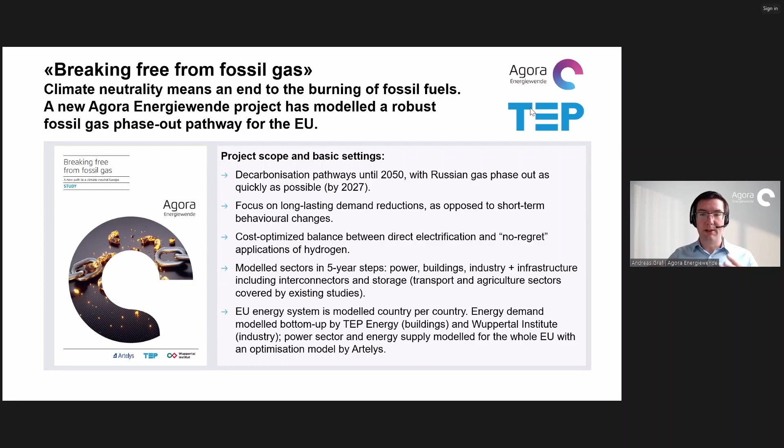This system was modeled country by country and bottom up, in the sense that the building sector was modeled in detail by TEP Energy, and the industry sector was modeled in detail by Wuppertal Institute, and this fed into an overarching energy system and supply model by Artelys. So this work is intimately interlinked and gives us this overall picture that we now can show.

Another note of background: we worked here in detail with 9 national partners to develop so-called deep dives for these focus countries. The choice of countries was such that we largely looked at Central and Southeastern European countries against the backdrop of the energy crisis and their particular dependence on Russian gas imports. It also makes for a very interesting stress test of the pathways we have developed, showing quite a variety of different pathways in the details of this transition that TEP Energy will also be touching upon today.

There were 4 key findings of the overarching EU27 study. The first finding was that fossil gas use in Europe can be halved by 2030 and completely phased out by 2050. We believe we have demonstrated that it is a realistic and plausible outcome, making the right investments and policy choices in the coming decades to phase out fossil gas in Europe, while still maintaining our industrial base and fully ensuring security of supply, without relying to a great extent on disruptive behavioral changes to deliver this outcome.

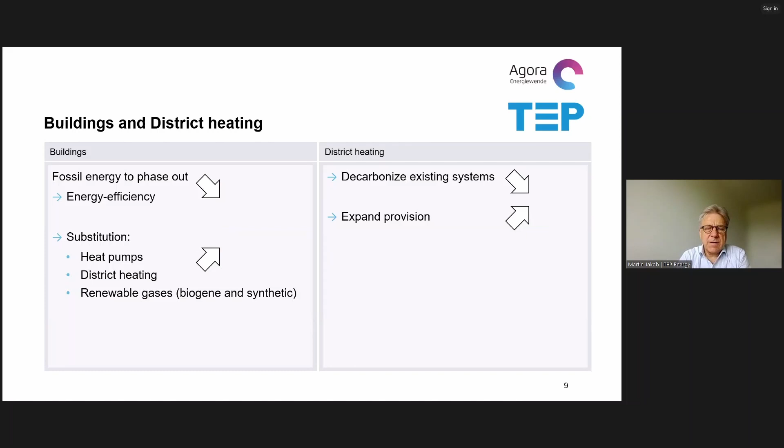When we first go into the buildings sector, what are we talking about? We are talking about final energy, which is delivered for first of all heating, but also hot water, cooking, and also appliances, lighting, cooling, ventilation, pumps, all sorts of different appliances, information and communication technologies, and so on and so forth. This electricity consumption of activities occurring in buildings is part of what we call the final energy, which is delivered by gas utilities, electricity utilities, district heating grids, but also in decentralized form by delivery of fuels.

Maybe to note, a bit peculiar is the term ambient heat. By that we mean energy that is tapped by heat pumps from environmental media such as air, water, geothermal. So in order to have a good distinction between what is the role of energy efficiency, namely to reduce the overall demand, and what is the contribution of such ambient heat, we also balance ambient heat in our results.

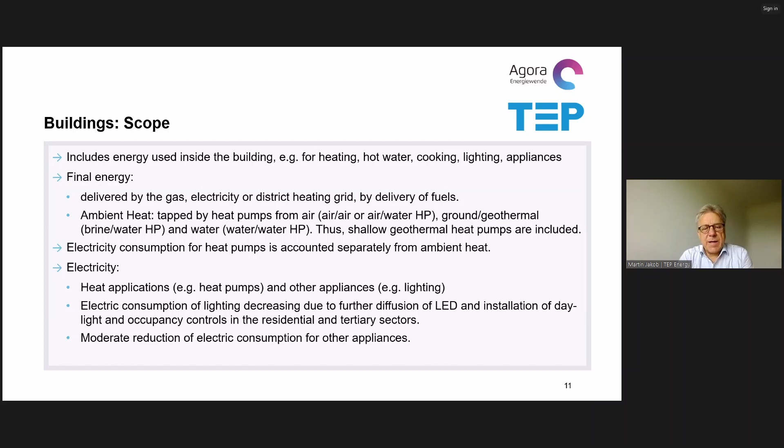In the case of electricity, we have electricity used from heat applications and from other types of applications, which we also roughly modeled and will be reduced as well in the coming years and decades. If we need more electricity for heat pumps and electric mobility, there's even more interest in getting more efficient on the appliance side and the building technology side too.

How do we do that? We have a long-term bottom-up model, a cooperation between TEP Energy and Fraunhofer ISI, where we model EU27 plus 3 and some more countries, starting with the main drivers, which in the case of the residential sector is the floor area of residential buildings and the number of households.

If you have these drivers, then you need to cover the energy demand of these buildings, which is influenced by insulation levels, efficiency of building technology and appliances, and very much so indirectly by the lifetime of these components, because this determines how quickly you can improve energy efficiency and displace existing heating systems by other ones.

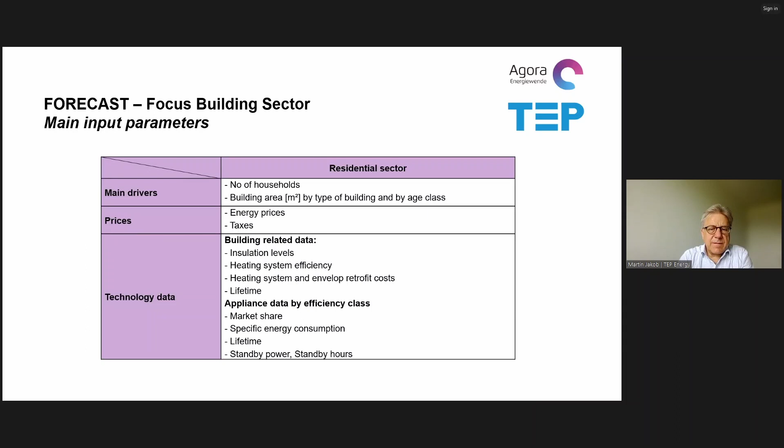From this rather abstract level, where we would like to make as realistic an outcome as possible of our studies and analysis, we place the decision of building owners in the core of our consideration, and this decision is influenced obviously by the costs of the technologies and by the costs of energy.

This in turn is influenced by policy measures, by taxes and fees, for instance. The decision of building owners is also influenced by preferences, by a certain willingness to pay, or a certain reluctancy against a certain system. These aspects are very important to consider.

This willingness to pay, or willingness to substitute, can be influenced by policy measures, for instance by subsidies, by tax incentives that would change the relative economic performance of different systems. You also increasingly need to work with more stringent policy measures such as bans and product standards. To a certain extent, preferential loans could also help steer building owners towards more renewable, more efficient choices.

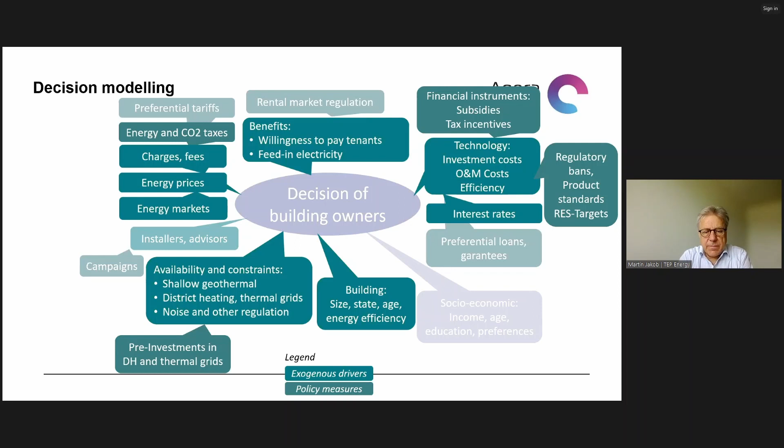You can see more details in the slides provided. Just a short glimpse here on our model, which contains a building database and a cost database, both feeding into the choice model, the discrete choice model, to reflect the dynamics of the building stock, which is driven by the decisions of building owners.

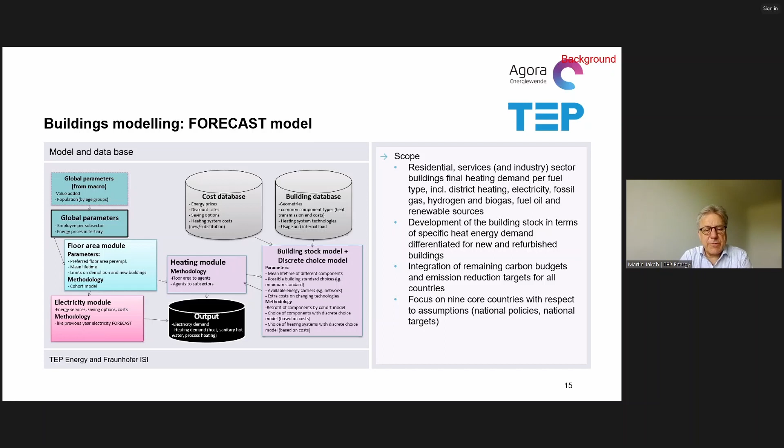As I mentioned, building owners' decisions can and should be influenced to a certain extent by policy measures. In this study, we assumed first of all that you should avoid any subsidy into fossil fuels, and instead price CO2 emissions with a carbon tax, the effect of which depends very much on the level of that tax. In Switzerland, for instance, we are at roughly 120 Swiss francs per ton of CO2, so we are somewhat more advanced in that respect.

100 euro per ton of CO2, just to give you a notion, is about 2 euro cents per kilowatt hour of gas. So it's a certain contribution, an add-on, but it doesn't fundamentally change relative energy prices.

Buildings need to get more efficient, often only done in the reinvestment cycle, where you can conceive subsidy programs, though the effect of such measures is quite long-term but still needed. As we know, renewable energy potentials are limited in their availability and also in their economics, so keeping a focus on energy efficiency in buildings is still crucial.

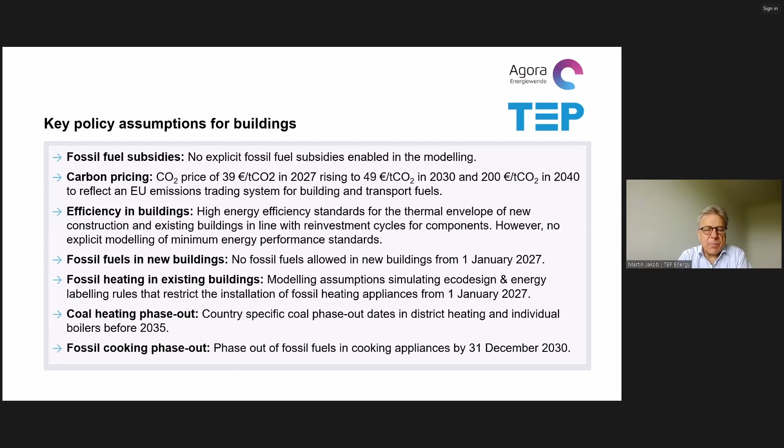We come to that in relation to district heating systems, where in some situations you perhaps need a certain period for planning the switch. Also in some countries, cooking is done with fossil gas, and that obviously also needs to be phased out if complete decarbonization is really to take place.

Different reasons, actually, we can come to that. And district heating is actually increasing a bit in absolute terms and a bit more in relative terms.

We have been focusing regarding the district heating question on these 9 countries Andreas mentioned. District heating could also play a more prominent role, but needs to be considered very individually to see what is realistic in the different countries, mainly because of the question of who is actually developing this kind of district heating system. For this reason, we didn't want to be over-optimistic or overstretch the role of district heating. Other players see a more prominent role in that, but we preferred to have a well-founded and fully analyzed role for district heating.

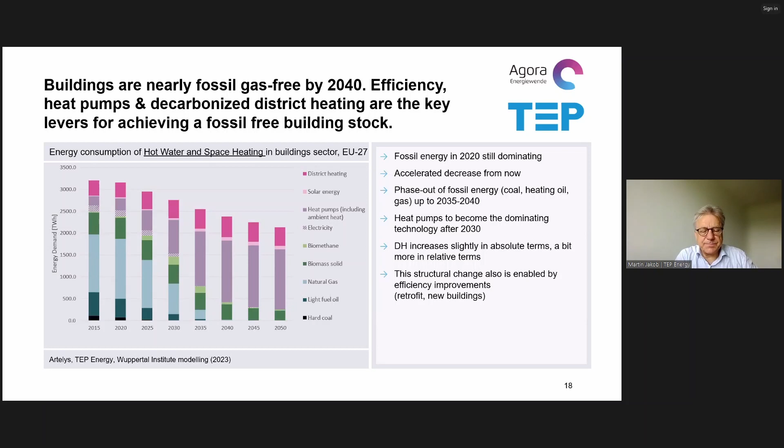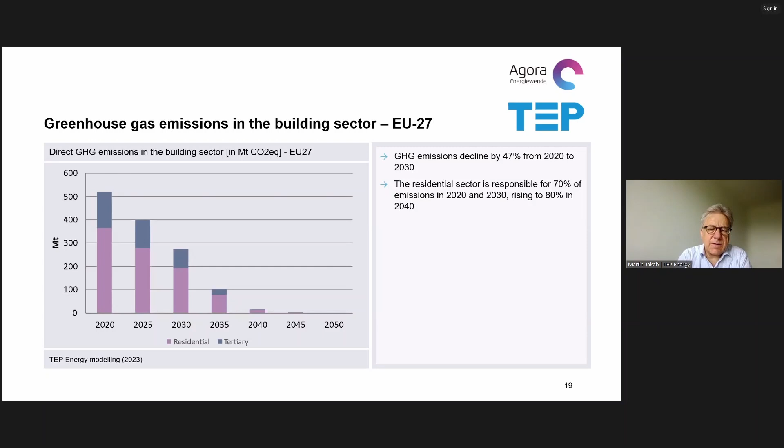So this pathway would then contribute to the overall emissions reduction pathway that was considered in this project, including the contribution of the other sectors.

Now, if we see a bit how the different countries would cope individually with the challenge of decarbonization, I have picked here two examples: a historical heat pump country, such as Switzerland or Sweden, as opposed to countries that are just starting heat pump deployment.

For instance, the Netherlands, which was very much on gas for a very long time. We picked Italy on the right-hand side, which started a bit earlier than the Netherlands, but still also has a very high share of gas in the heating sector. For this reason, starting later and having a bit of a lock-in effect, Italy in the end would not have the same level of heat pump deployment as we see here for Switzerland, for instance.

So you need to be aware that depending on the starting situation of the different countries, the pathway and the mix and the change of the mix can vary. So what we see on EU27 can be different from individual countries.

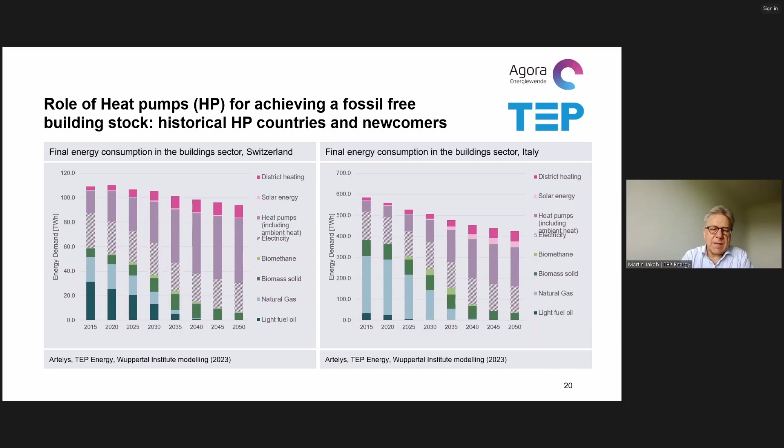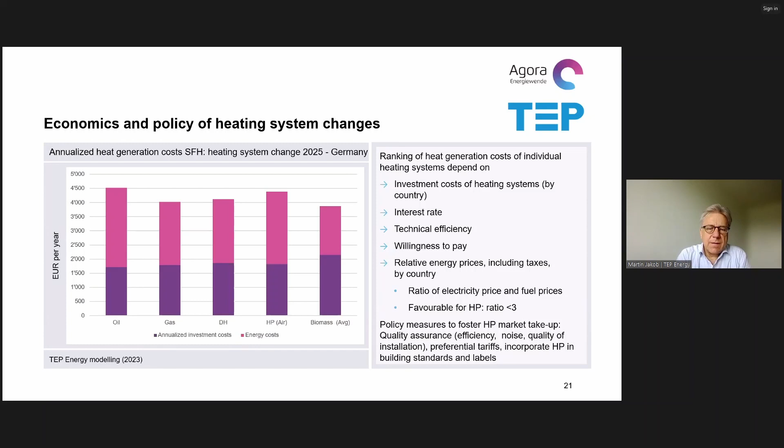of electricity demand in space heating, especially heat pumps. At the same time, in some countries we should also displace direct electric heating systems which are very inefficient. A heat pump could actually replace 3 or 4 of those direct electric heating systems, so that potential and efficiency gain was also considered here.

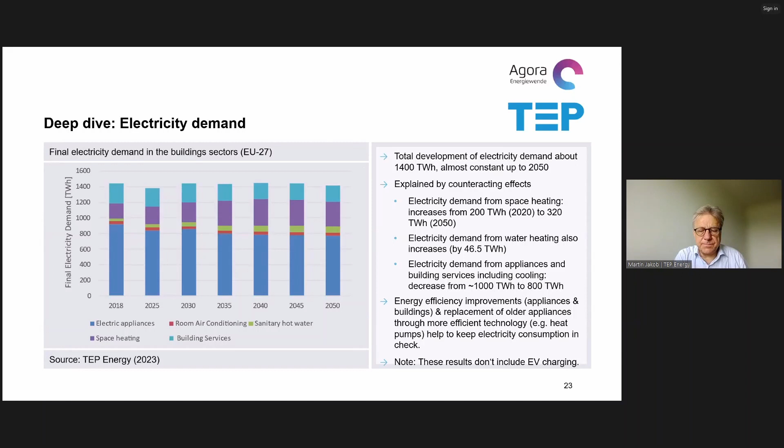So it's as opposed to when we started heat pump deployment in Switzerland or Sweden in the 90s, that was very different. You had some small pioneer companies that would almost manufacture heat pumps manually, to say. Currently, of course, we do have an industrial production of heat pumps. Part of the components are imported and then assembled here in Europe.

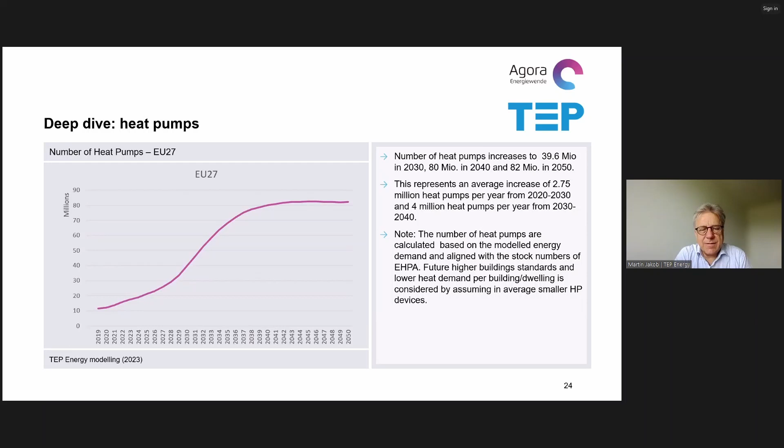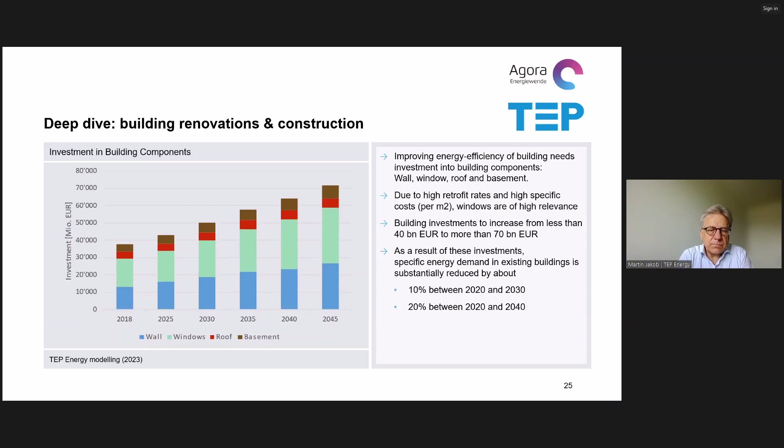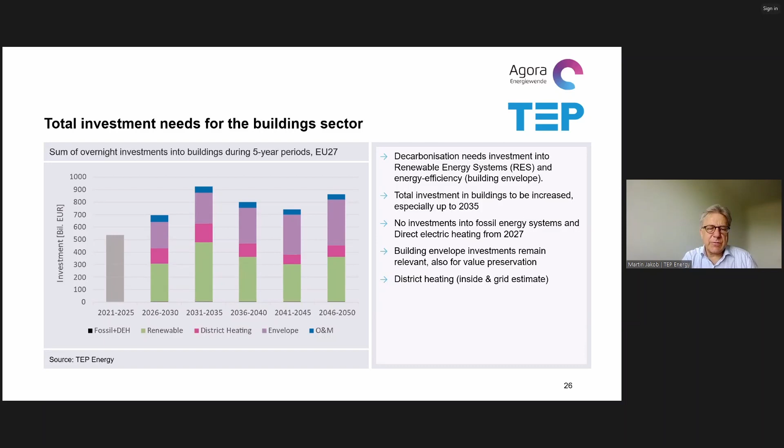If we go then for the overall investment pattern, we see especially a certain peak in the period after the 2030s. This is also due a bit to the intermediate goal that was defined in the modeling exercise. The main message here is you need to increase these kinds of investments next to the building envelope, which is here, let's say the pink, the violet part. There is also investment in renewable energy systems, which is the green part, and in between somewhere certain investments in district heating on the building side, and of course on the infrastructure side, which is not part of this chart here.

This is what I wanted to convey from the part of the buildings sector. I would now switch to the district heating one. And the first question here is, of course, why is it useful? Why would we need district heating? Is it needed at all, and if yes, why?

From the analysis of the past years, we can actually distinguish two types of motivation, if you like. The first one is a positive one: if district heating is favorable in high energy density areas and settlements, it is actually easier and more cost effective to provide heat in buildings through district heating systems. So that's a positive motivation.

It's also a low-cost solution for building owners - they don't need to invest so much, which is appreciated. And maybe not to neglect, you only need to convince fewer actors to decarbonize the building stock, namely these district heating companies or those that would expand or create new offers in that area.

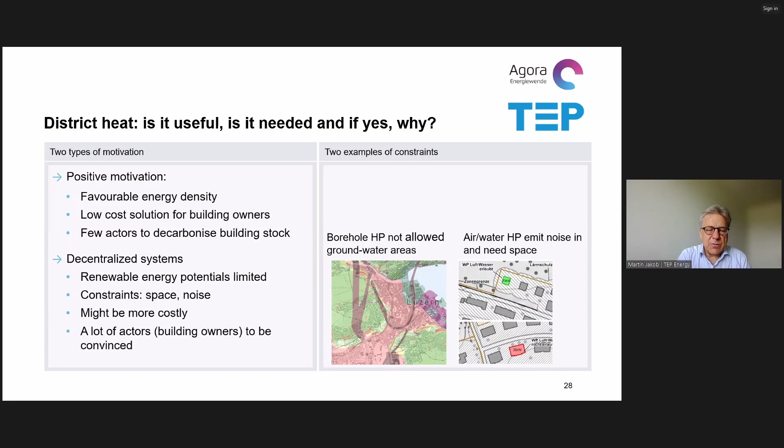The disadvantage is that with decentralized systems, you need to convince many actors—building owners and ideally also tenants living in these buildings who face the costs. So from these two perspectives, we see a motivation for district heating as part of the decarbonization process in the built environment.

Countries start from very different situations regarding district heating provision. The share of district heating in final energy demand for buildings shows a tremendous difference between countries with almost no district heating tradition and others that reach up to 50%. If you zoom into larger buildings, multifamily homes, non-residential buildings, that share is even higher—think of cities like Stockholm, Copenhagen, Denmark, Sweden, but also Eastern European countries like Poland, Czechia, which have very high shares of district heating in certain regions.

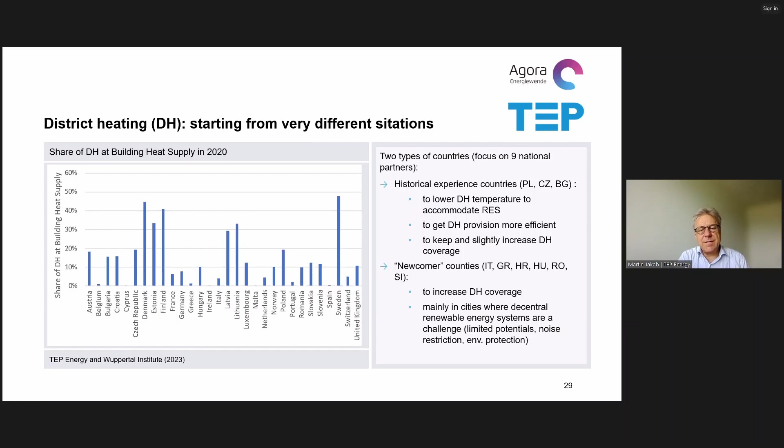Between these historical countries and the newcomers, the challenges differ to a certain extent. The historical ones need to decarbonize their existing system and pay attention to keeping clients so they don't switch to decentralized systems because of price or environmental concerns—in Sweden, for instance, owners switch back from district heating because they'd like quicker decarbonization. Whereas the newcomers need to build up an energy system like district heating first, which takes time and investment.

So how do we consider all this? We're not able to formally implement all these steps in the model, but we do consider these aspects, starting with the demand side: what is the topology—single-family house neighborhoods versus other types—and what is the heat distribution cost in these different settlements? That determines a reasonable scope of district heating coverage in cities and consequently in countries, determined by heat delivery cost, which is also interactively determined by the cost of competing energy systems.

Once the demand-side potential is determined, the second question is: if district heating is available at a certain location for a building, will that building owner connect or not? This is modeled using a building stock model approach, modeling the decision of building owners as sketched earlier in the presentation.

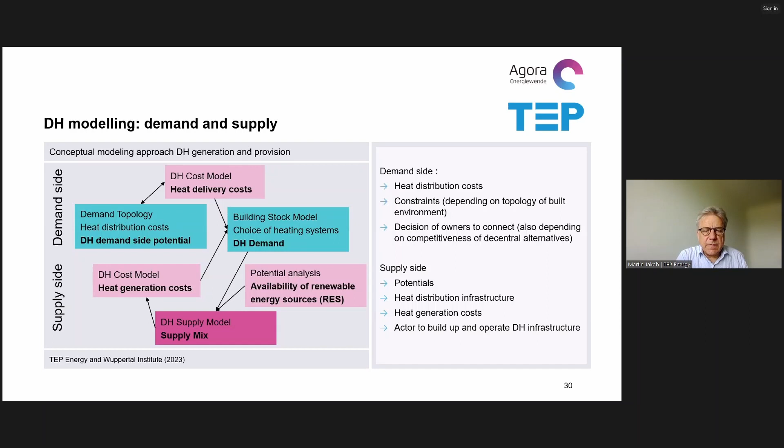So here's just an example, we did not do this for the whole of Europe for that project, but just to give you a glimpse, on the right-hand side you see how the area that could be delivered by district heating depends on the assumed heat distribution costs. At low cost you can provide centers of towns, not necessarily all towns, but highly densely populated settlements. The more you increase the heat distribution cost, the more you could expand the buildings and area covered by district heating.

On the left-hand side, sometimes you can combine cold and heat demand or needs of buildings, where residential or non-residential buildings would have a more pronounced demand for cold. This would also entail the type of district heating grids, going more for an ambient low temperature grid, especially if you can start a district heating grid from scratch, as opposed to historically grown district heating grids which often have a high temperature, which is then the challenge of how to bring down.

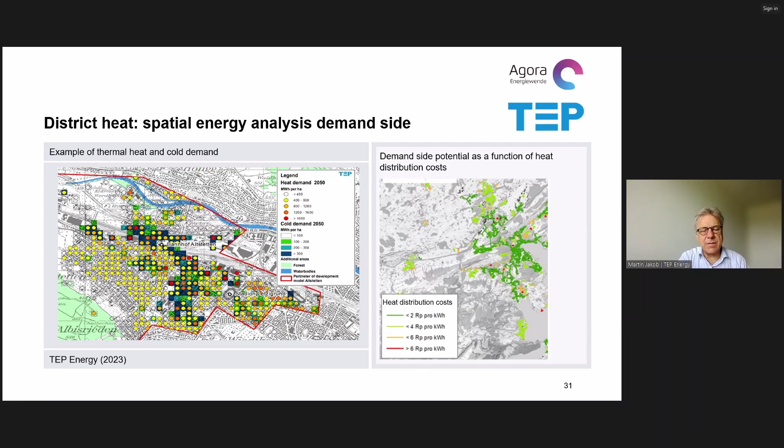Just to give you an impression of what it actually means, you can maybe focus on the middle column here. Based on an analysis in Switzerland with cities of more than 10,000 inhabitants, you would see a certain part of the buildings where it's actually very hard to implement decentralized systems. That's almost the natural way to install a thermal grid.

Then you have quite a large part where actually both is possible, so you can think of thermal grids, but you could also think of heat pumps, particularly geothermal or air. Then there is another part of the building settlements where only one of the two, or none of the decentralized systems, is possible.

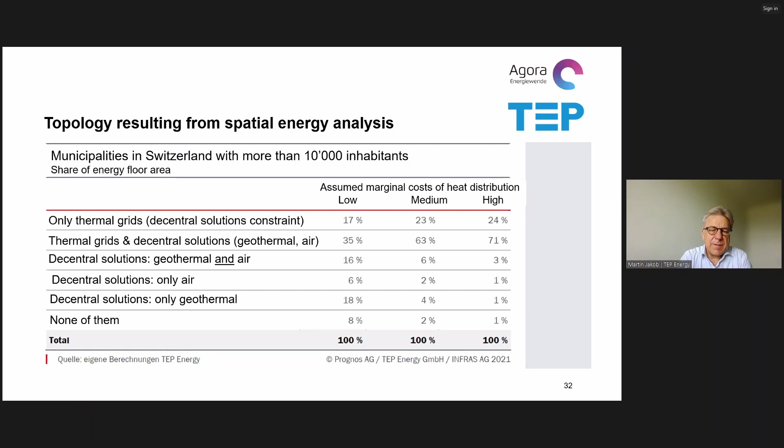Depending on which heat distribution costs you're willing to cope with, you can expand the part where the thermal grid could play a solution. If you only accept the low distribution cost, then only one-third in this example could be delivered by both, where you have that competition situation, and another 17% where it's almost the exclusive domain of district heating. That was on the demand side considerations.

On the supply side, we do see that in each plant or system you will have a mix probably between base load, medium load, and peak load, where base load could be large-scale heat pumps tapping energy from water, rivers, or whatever. Peak load could be anything between biogas and even direct electric heating for the very small last part, and where peak, medium, and base load lies very much depends on the local situation.

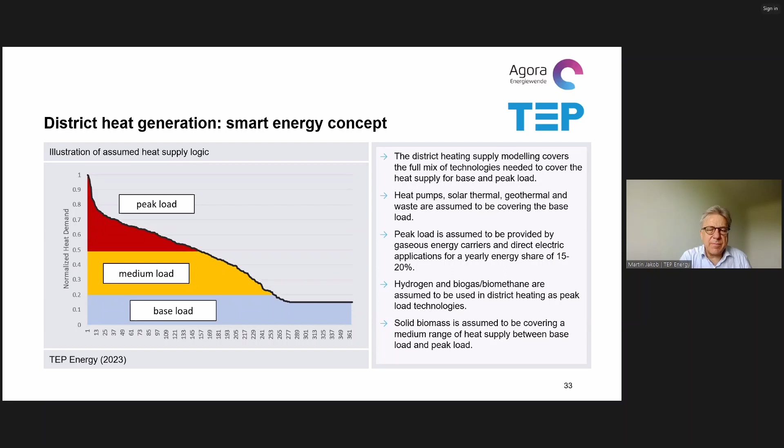Our message is not to conceive district heating systems, for instance, that purely would work on biomass, because first of all we don't have enough biomass, and secondly we'd lose the opportunities of more attractive, more cost-effective baseload sources that are available in many situations.

Now just a few notes, similar to how to interpret the results as in the building sector. We also talk about ambient heat, which can also be tapped in district heating systems by large-scale heat pumps. In terms of sources, maybe to pick here the deep geothermal heat that is actually available in different forms.

There's also shallow geothermal with small borehole heat exchangers, then the medium depth one where you try to get hydrothermal layers—this is done very much in the Paris basin or in Munich, I think so too—and you would have the very deep geothermal, where you could also produce electricity.

We didn't focus so much on the latter one, simply because you need time investments for exploration, and there's a certain exploration risk whether you find such good layers or not. But this deep, mid-deep geothermal energy is still also a joker in the whole discussion.

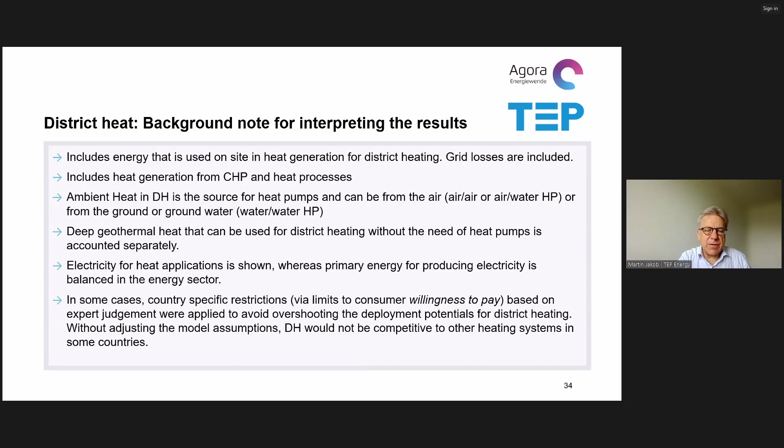Then biomass was the choice in countries that started decarbonizing, especially in the Nordics, in the Baltics, and also in Switzerland. They are unfortunately pushing this pure biomass, small district heating grids, and I think now they're starting to realize that we don't have enough wood resources to do it in such a manner, but we really should use

the biomass for the peak, maybe medium load, not for the full coverage of the heat demand. Ambient heat, which is tapped from heat pumps, is still at very low levels. There are, of course, examples of large-scale heat pumps in Stockholm for instance, and Vienna, and other cities. But certainly that needs to play a more prominent role in the future.

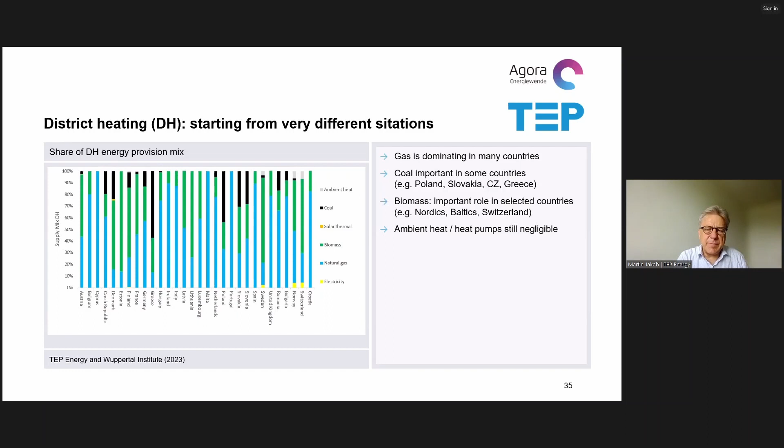Now the result from the analysis, you can see here, is a bit similar in that sense as from the building sector. We need to phase out fossil gas, which is here, and coal, obviously, which is on the bottom left of the chart. Then we have a bulky contribution of bioenergy, which could even increase a bit in the medium term to quickly phase out fossil energy, but after that should rather be reduced, because bioenergy material should more concretely be used in other types of application.

Particularly, it should be used for construction, first of all to displace energy- and carbon-intensive traditional construction materials and building types, and secondly also to store at least intermediately carbon in the built environment, in the construction of buildings, instead of just using biomass and wood as an energy source. When you do so, at that very moment where wood is burned, you release emissions, although these emissions were captured by nature before, but you just release it again. As opposed to using it for construction, then it's at least stored, and there's an opportunity to reuse it several times for quite a long time.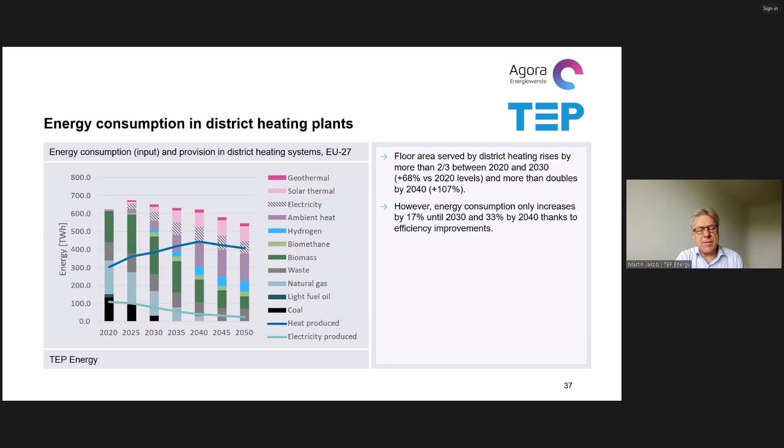Because from an overall systems perspective, the analysis showed that electricity is rather produced by other means than by CHPs in district heating plants. If you would maintain CHP, then the question would be what is the energy carrier, and the potential of biogenic or synthetic fuels is rather limited and more costly. So electricity is rather produced by other central means, power plants, or decentral means, obviously wind and solar PV.

In terms of emissions, we see here not a complete phase out. The remainder emissions from 2040 are basically those from the incineration of waste, which in our study is balanced as real emissions.

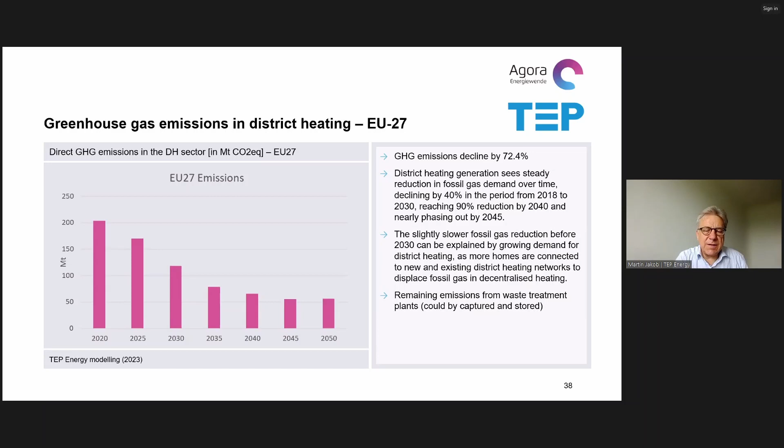Could be, of course, also covered by CCS and captured and stored. This is an additional joker we haven't balanced, but if complete decarbonization is needed, that's one option. The amount that needs to be captured is very limited compared to capturing all emissions of today—really two orders of magnitude lower, and therefore feasible.

Also here, two countries I wanted to select to show that in terms of district heating provision, countries are at very different starting points. On the left-hand side, you see Poland, which has this tradition of district heating, though not dominating—there's also other heating sources, especially coal in small buildings. As opposed to Italy, where it really starts at a very low level. From interaction with the national partner in this project, we see a certain contribution of district heating. I personally still see the benefit of district heating in cities, and Italy has some cities in the north that need to be provided with heat as well.

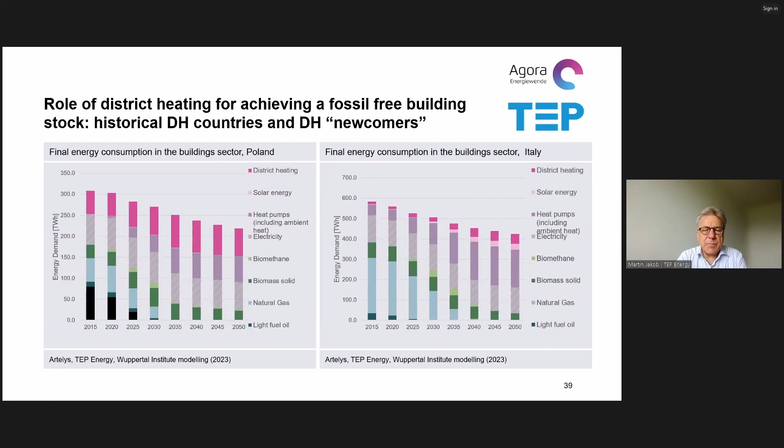But there are also some barriers—we'll come to that. And, concluding, I'd like to end with these kinds of barriers.

District heating is, in my opinion, based on the analysis, part of this decarbonization solution of the built environment, especially where you have constraints with decentralized systems. The more you look, the more you analyze, the more you talk with engineers trying to implement decentralized systems in cities, the more aware you become of these challenges, and the more the relative benefits of district heating appear.

I think it could be an opportunity for energy utilities, especially those in the gas business. To say it roughly: providing building owners with gas means you need a pipeline, you need to construct the pipeline, and you need to sell energy. District heating is almost the same—of course not exactly, but not so far away. So energy utilities could see district heating as a business.